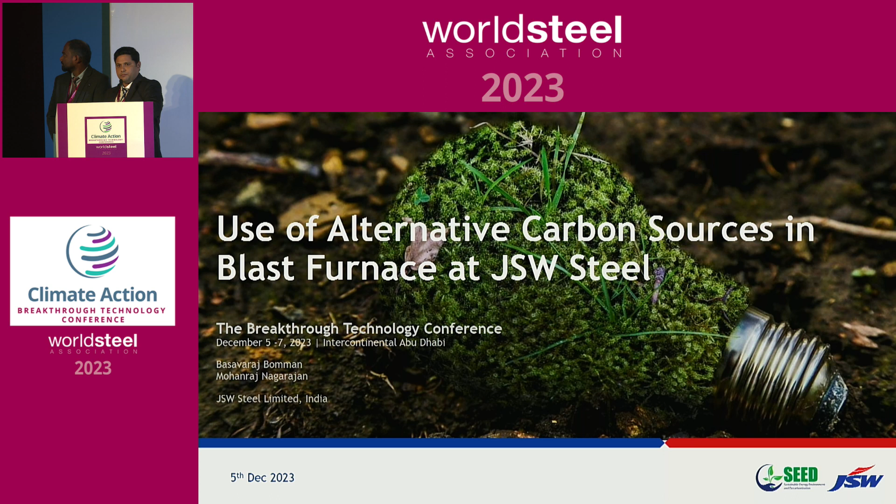Let me introduce about JSW Steel before going into details. JSW Steel is presently 28 million ton capacity, and it has 5 integrated steel facilities across India and also 7 downstream facilities in India. And also we are present overseas, we have facilities in USA, we have facilities in Italy.

Both put together having a capacity of 3 million ton. If you see the right side of the slide, which shows the growth journey of JSW Steel, JSW Steel started in FY99 with 0.8 million ton capacity with Corex technology what we have started with. And we are very ambitious and aiming to achieve 50 million ton capacity production by FY30.

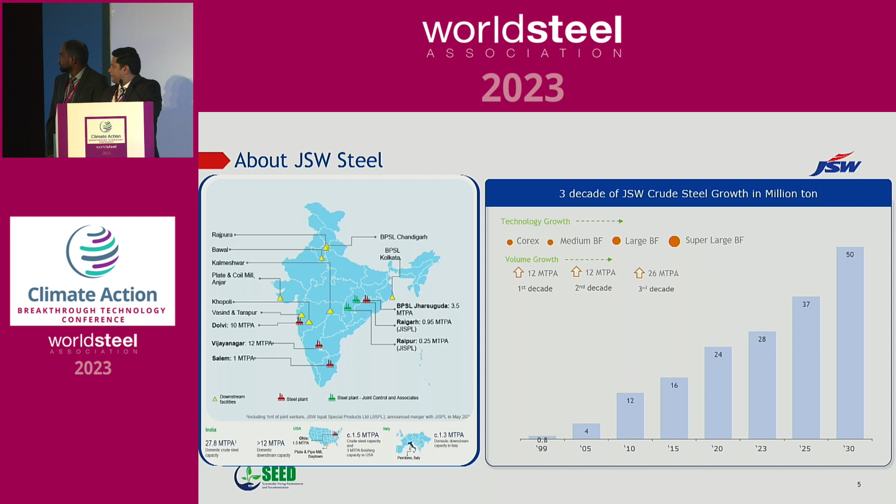As for any business, sustainability becomes the paramount focus area for us. The Sustainable Development Goals, 17 parameters, are the major paramount focus area. We are in line with the national and international framework, and along with that, we are driving sustainability initiatives across all platforms, and also started reporting sustainability parameters in integrated reports.

So I want to seek your attention on this slide, which shows JSW's roadmap for decarbonization. We are targeting 48% CO2 reduction by FY30. If I see, the graph shows two parts of this.

One is whatever we have achieved till now. The base year is 2005. From 2005 till now, we have reduced around 30% of CO2. From here, the challenge and journey begins now. The challenge is very high.

Further onwards, we are planning to reduce around 18 to 20% of CO2. So by FY30, we are committed and published that we will be less than 2 ton of CO2 for producing 1 ton of crude steel, somewhere around 1.95. Though it is published, we have got an internal target much lesser than this.

So the major levers for reducing the CO2 is, one is RE power, the second one is solid fuel reduction and gas injection in blast furnace, pellet burden and increasing pellet in blast furnace, scrap addition and waste heat recovery.

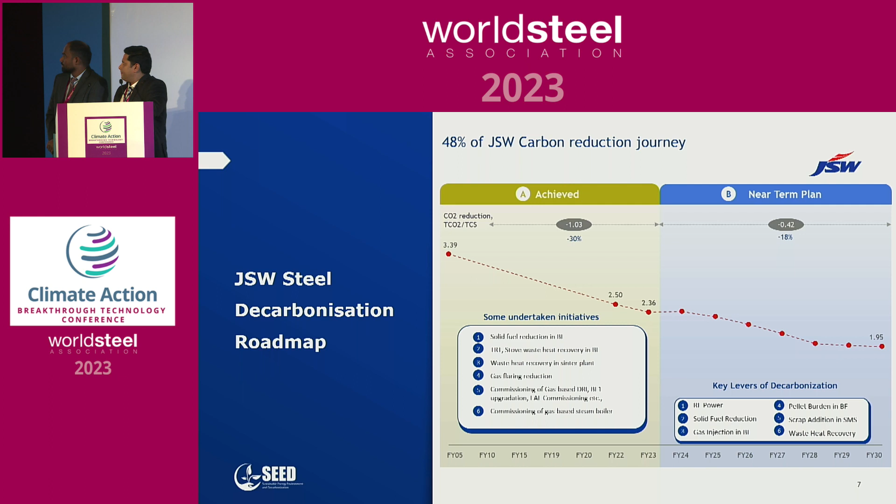So in the last slide, we have seen the short-term plan. In this, we are seeing this decarbonization journey strategy for JSW Steel. We are working on 4 different themes: fuel and energy recovery, and energy and technology transformation and circularity.

So in the long-term plan, we are planning fuel rate optimization through hydrogen injection in blast furnace and syngas addition in blast furnace and hydrogen injection in DRI units.

Coming to energy recovery, we are planning top gas recycling. In the morning session also we have seen the Corex 50, so this is also one of our main concepts, and slag heat and waste heat recovery of the slag. In this energy transition, we are going to transform the technology of end campaign BF and implement CCUS across our manufacturing unit. We are also working, and soon we are going to commission scrap-based EAF facilities in our complex.

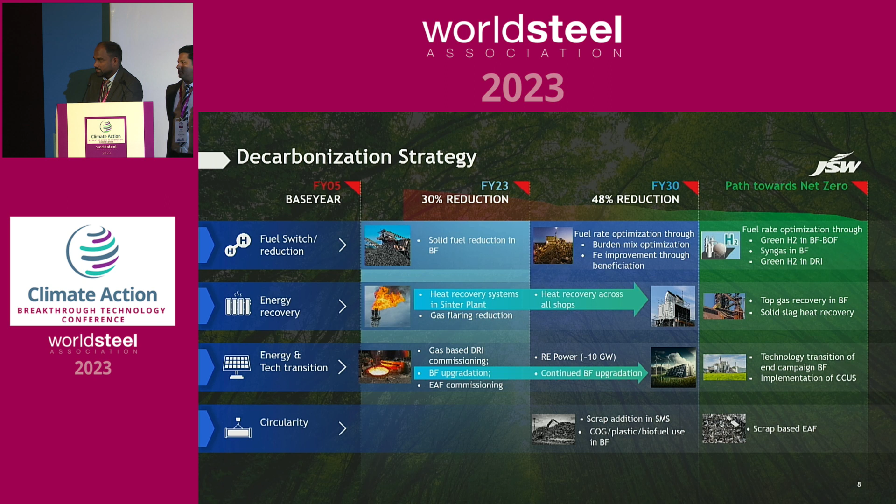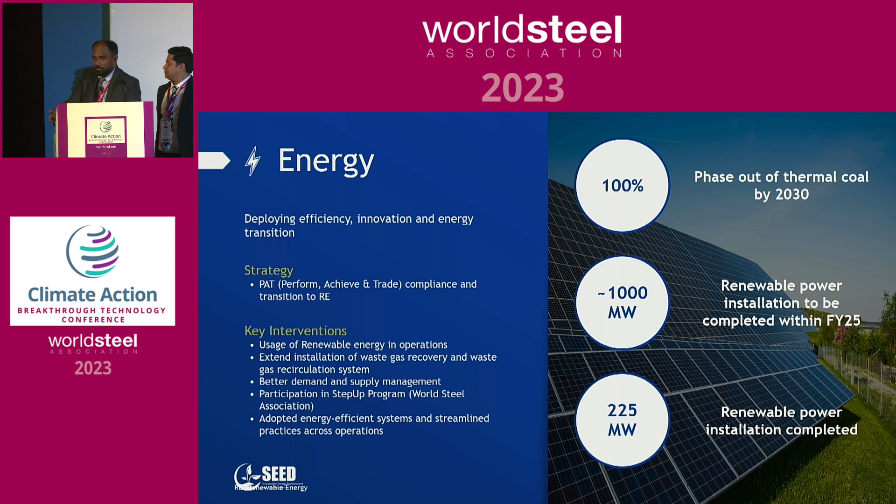Coming to one of the major initiatives, as of now we are operating 225 megawatt of integrated steel plant facilities, and this is solar based, and 600 megawatt of RE through wind we are going to commission very soon. Total by FY25 we will have 1000 megawatt RE power in the integrated steel plant facilities. By 2030, we are going to phase out 100% of thermal coal-based power production. We'll be around 50% RE power in our circuit, remaining 45% gas-based power, and remaining 5 to 8% from the grid.

The next major initiative is green hydrogen. We already have a foundation of 25 megawatt electrolyzer, capable of producing 5,000 nm cube of hydrogen. In phase 1 and phase 2 we are going to make 20,000, and in phase 3 we are going to make 125,000. This will fulfill our requirement of green steel production for DRI units. We are already running a 2 million ton DRI unit in Vijayanagar.

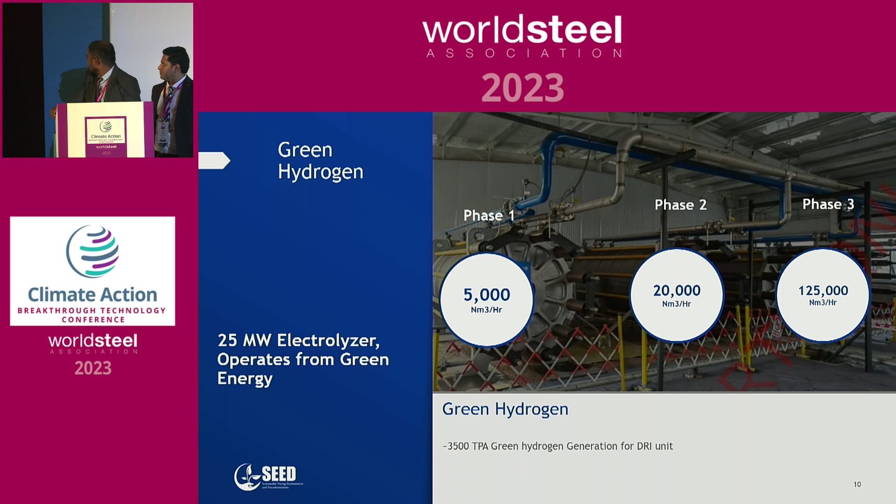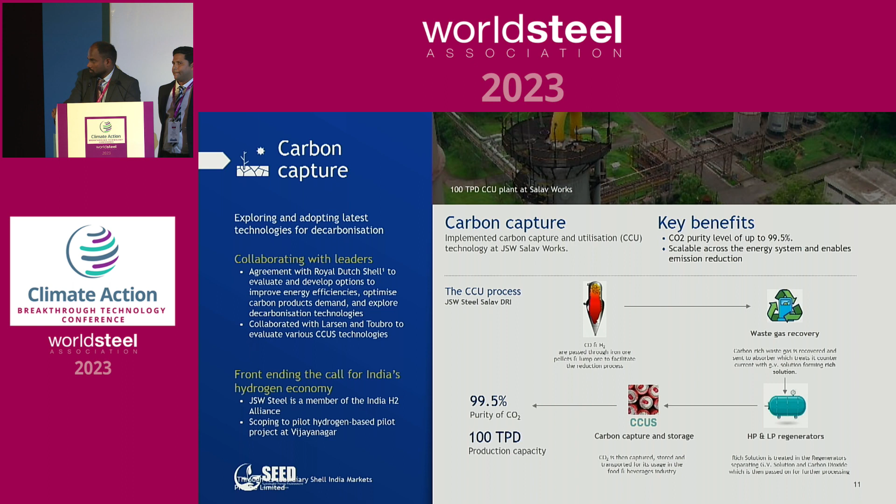The third is carbon capture. We already have a 100 TPD carbon capturing plant in the Salav unit, with a purity level of 99.5%. We are working to scale this production unit to all manufacturing locations, and we have tied up and collaborated with suppliers to study the feasibility of various CCUS technologies in our complex.

Let me tell how the decarbonization journey is going in JSW Steel. We have launched a program called SEED, which stands for Sustainable Energy Emission and Decarbonization. This program was launched in JSW Steel Vijayanagar, and now it is horizontally deployed in Dolvi, Mumbai. This program involves bottom-up employees capturing ideas for decarbonization and energy conservation.

We have identified more than 400 participants and more than 200 initiatives. These initiatives are being tracked and monitored in climate action centers. We have 15 climate action centers in JSW Vijayanagar, where all the projects are tracked and monitored every fortnight, and we have 40 initiatives which we implemented in the last financial year.

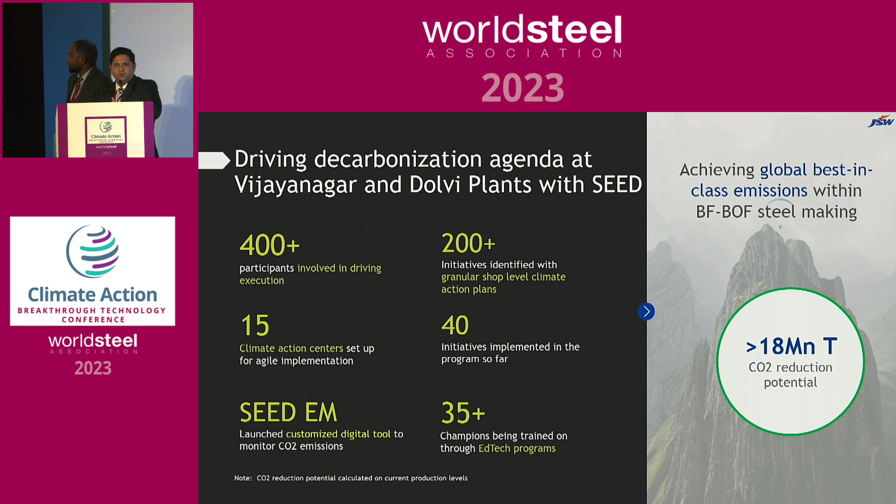There is a digital platform called Seed Emission Manager, where the CO2 generation and impact KPIs affecting CO2 are tracked in this emission manager dashboard. Access is given to the shop floor manager, who will be able to see the impact of CO2 by different KPIs and processes, and we will be able to take control.

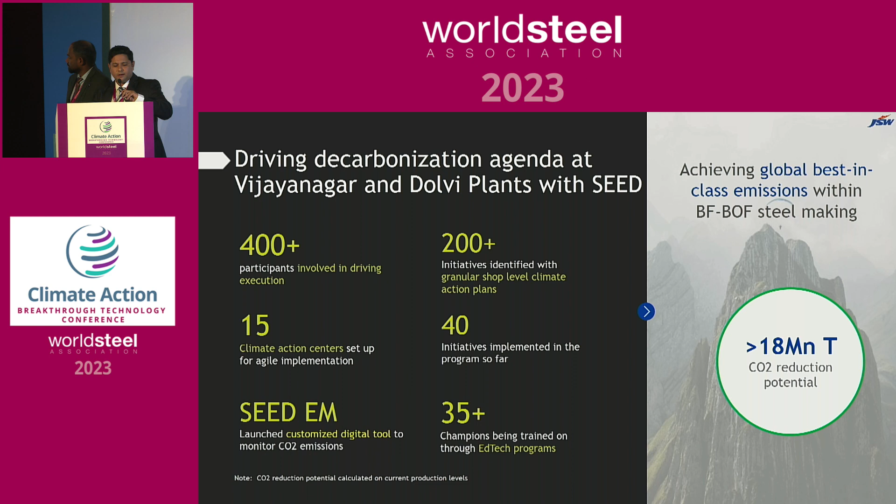Through this seed emission manager, we are aiming to cut down CO2 emissions by 18 million tons. There are more than 200 initiatives as I mentioned, across different themes like fuel consumption reduction, circularity, and alternative fuels.

Today I would like to take a deep dive into 4 focus areas, 4 projects: waste plastic injection in blast furnace, COG injection in blast furnace, super sinter which is injection of COG in sinter plants, and charcoal trials in sinter plant.

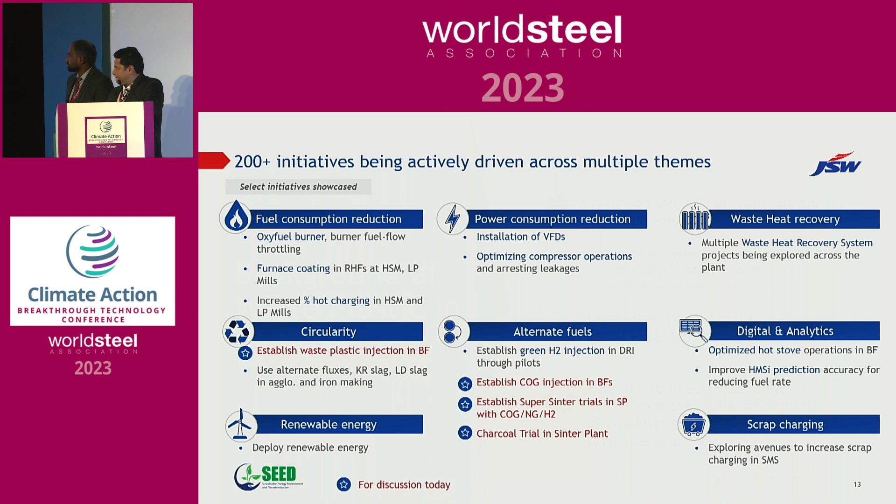Let me give some context before going into details of the plastic injection. In India, almost 10 million tons of plastic is generated every year, out of which 60% is recycled and 40% creates pollution. India is presently operating with capacity to produce around 120 million tons of steel.

It is very ambitious to produce 350-400 million tons by 2050. At the present level of 120 million ton capacity of steel production, if we consume 4 million tons of plastic in our plants in India, that would be around 30 kg plastic injection per ton of hot metal in the blast furnace, which will give us a good benefit.

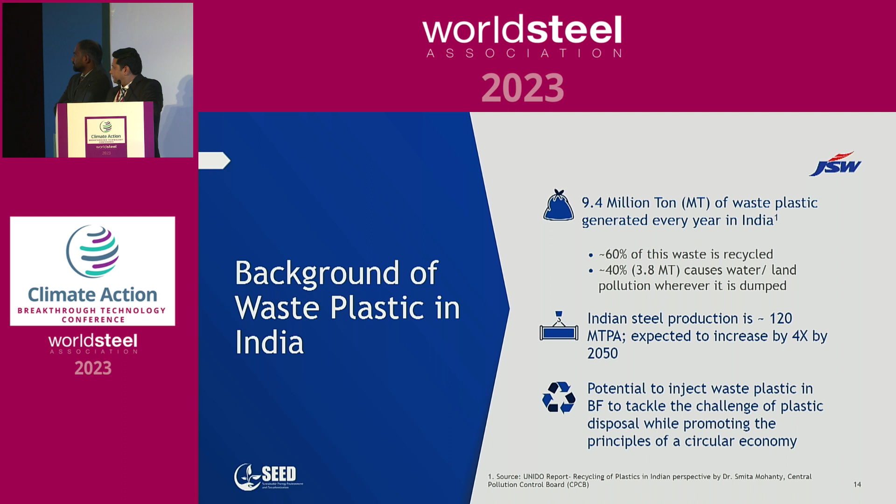To study this 30 kg impact in the blast furnace, we decided to begin trials to check the feasibility. The objective is to demonstrate successful plastic injection by conducting multiple trials using various kinds of plastics like chips and granules, and different kinds of lances for injecting PCI, like single lance and coaxial lance, with and without PCI. We have set up a design of experiment and started working on this.

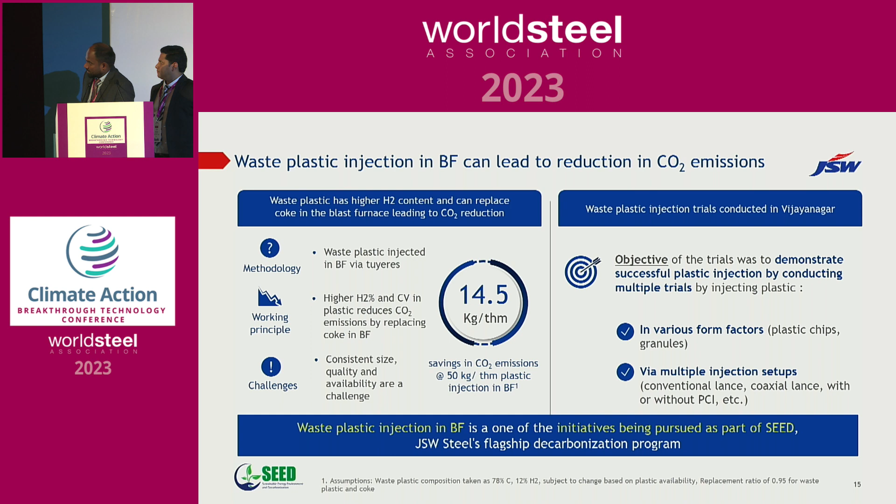The main methodology is we are planning to inject via tuyeres. Because of higher hydrogen content, it's a good replacement - we are doing a one-to-one replacement of coal to coke to plastic.

We conducted various trials. The first set of trials used fibrous plastic chips up to 20 kgs, which we took from our state government. We saw some problems with our injection facility because of the fibrous nature of the plastics, and our hopper got choked.

The second trial, we planned to use granules. We started this in one of our medium-sized furnaces, around 2,000 meter cube furnace. Initially we started injecting up to 1 kg, but it got melted in the lance while we were ramping up to 30 kgs.

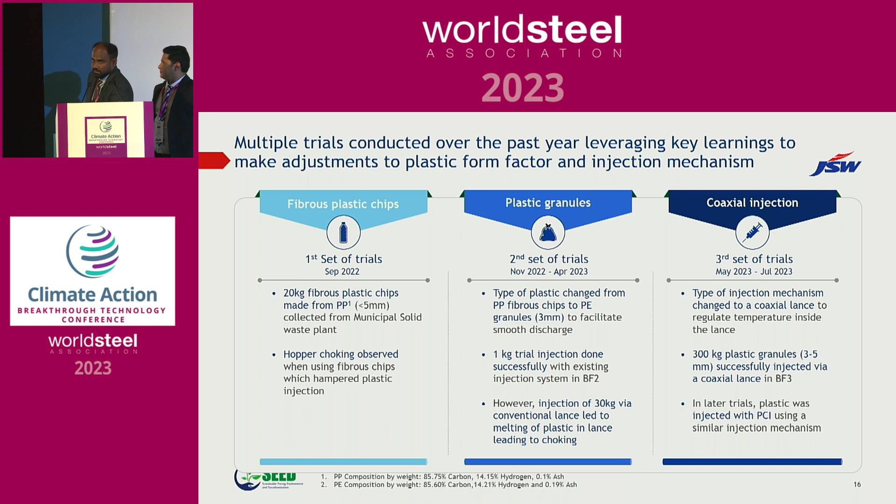So we set the third trial with coaxial lances, where we injected around 300 kgs. The melting problem with the single lance is avoided in the coaxial lance. So this first set of trials, this is what we did - the hopper got choked.

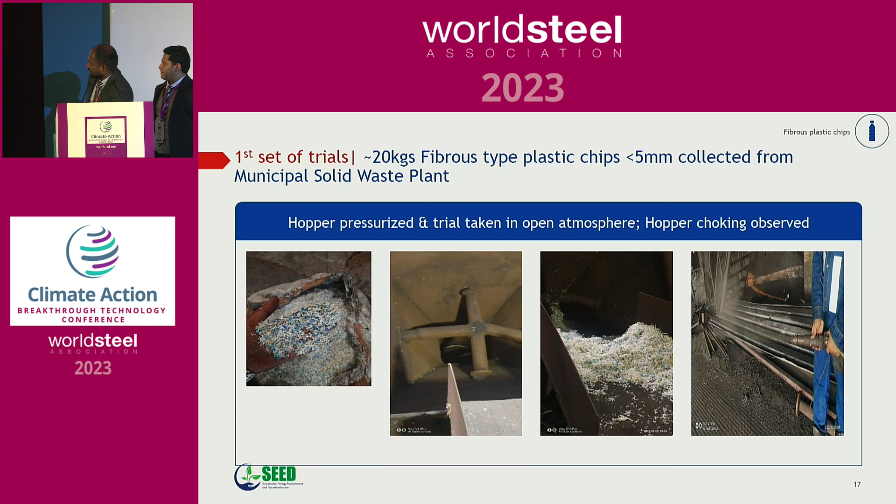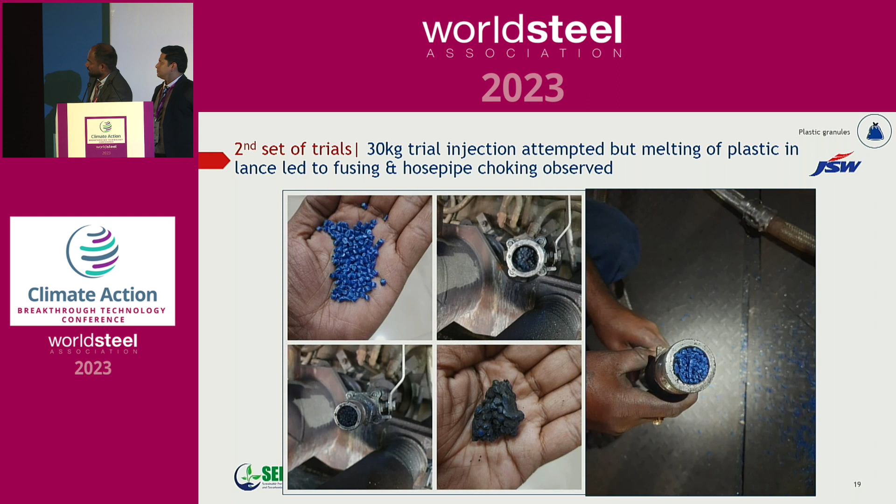So we went for the third set of trials. This is the image of the third set of trial, injected in a 4,000 meter cube blast furnace. It was successfully injected up to 300 kgs. The plastic size is 3 to 5 millimeter granules.

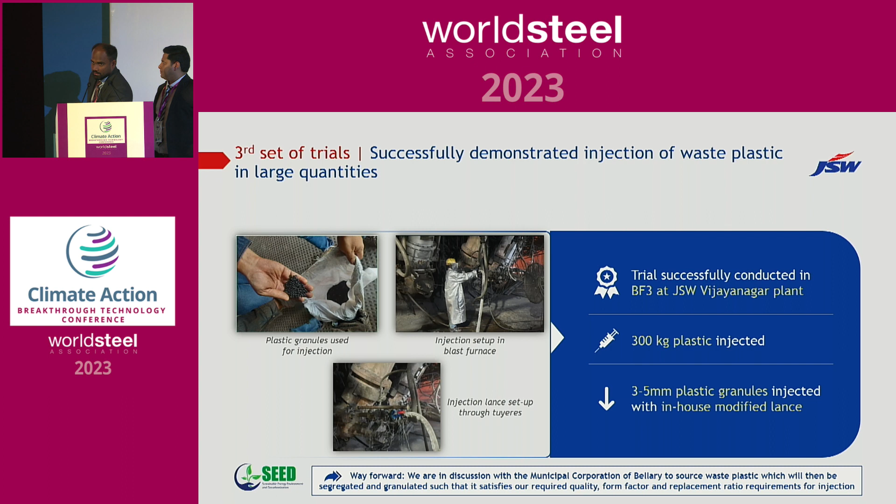Going forward, we are discussing with our state government to identify and segregate the granules, and we are going to scale up the usage.

The next lever is COG injection in blast furnace. Before going to details, I want to give the context setting of COG. We have 3 coke oven plants with a capacity of 6.5 million tons, generating around 3,25,000 nm cube per hour of COG gas. Presently this gas is being used in reheating furnaces in the downstream mills and such.

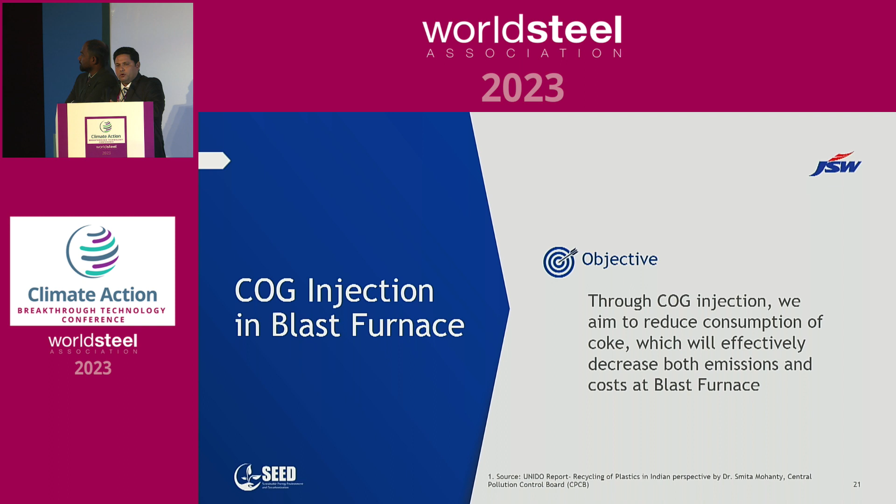In future, as I told already and my colleague also told, we are going to go for RE power, 1000 megawatt, and also we want to go for electrification of these reheating furnaces. With that, we want to use this COG gas and inject it in the blast furnace.

This slide shows the chemistry of the COG gas in our plant. It is much rich in hydrogen, with 56%, and methane around 25%. The challenge for using this COG gas remains the impurities, which we are working on.

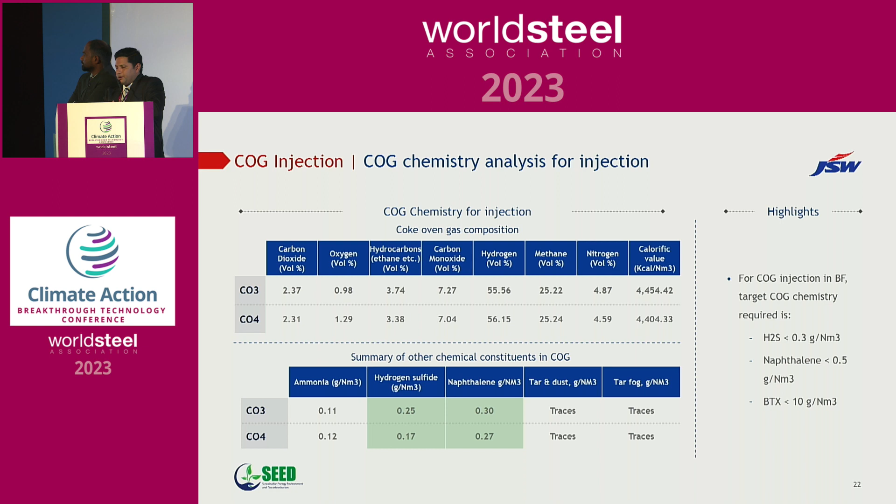While carrying out this COG study, we did an understanding of the CO2 impact. COG can be injected directly in the tuyeres, or we can see the impact of making syngas and injecting it in the shaft. We selected two furnaces: a medium size furnace of 2000 meter cube and a 5500 meter cube capacity furnace. In small or medium size furnaces, this COG or syngas impact is very, very small because of the efficiency factor.

In the large furnaces, while adding this coke oven gas, we are getting good benefit within 2 years. We are getting syngas benefit of around 66 kgs in large furnaces, whereas we can increase the syngas in smaller furnaces up to 400 meter cube. We are getting around 99 kgs benefit in CO2.

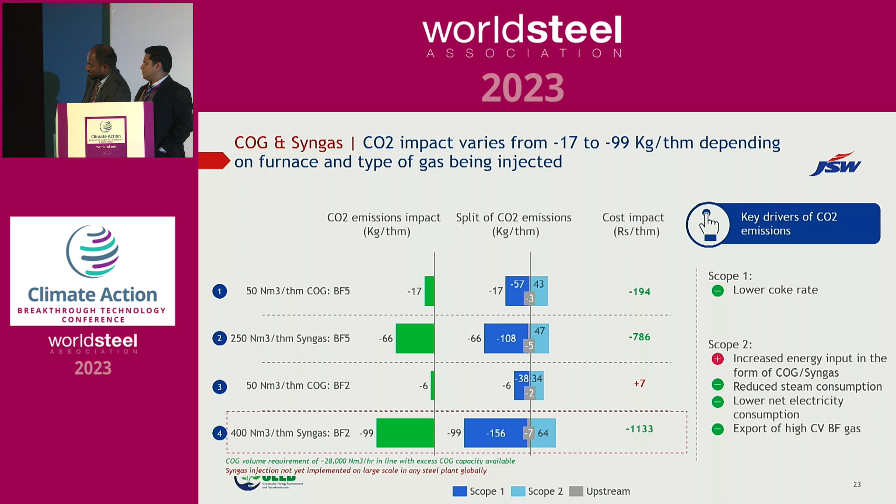The major impact is on scope 1 and scope 2. Because of the higher grid emission factor for converting COG to power, we are getting a lesser benefit from COG injection in the blast furnace.

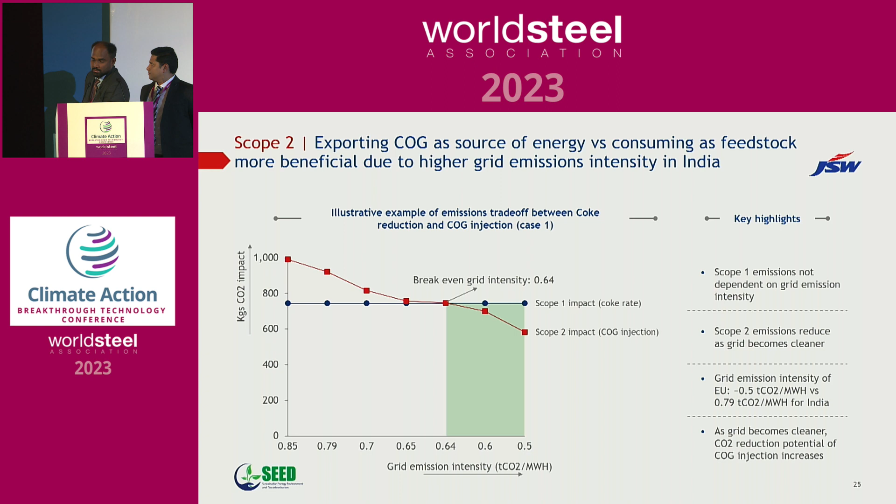Coming to super sinter, we have taken trials and studied super sinter at our plant. As I mentioned, we have COG gas and we want to inject it into sinter making also. We want to take that gas into the hood and put it into the sinter plant.

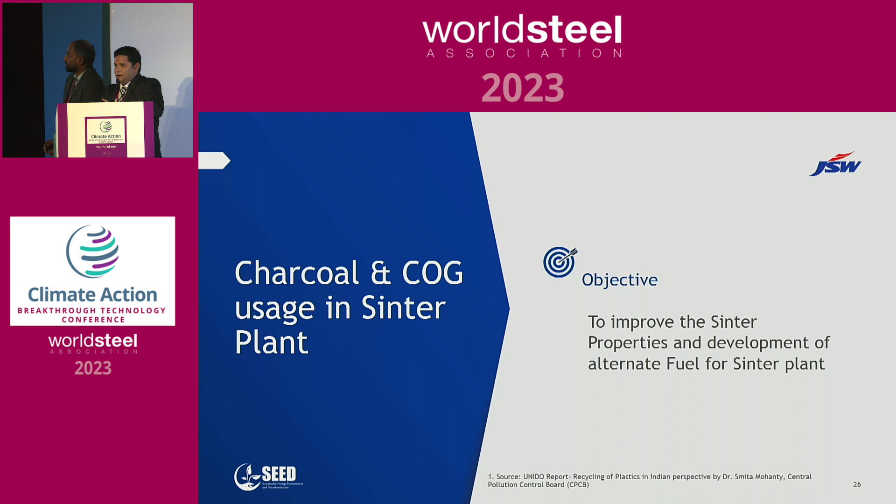This is about... sorry. Yeah, this is about the charcoal that we use in the sinter plant.

Charcoal, we have taken multiple trials. We replaced the solid fuel, that is coke breeze, with charcoal. The replacement, we put trials of around 22%, 45, 65, 85%. We could see there is an improvement when we add this charcoal at 20-25%. Over and above that, it gives a negative impact.

The sintering time has come down at 25%, and the tumbler index has improved. So in overall benefit, there's 8% improvement in productivity, 1.4% improvement in the tumbler index, and 15 kg CO2 reduction. It has also improved the SOx and NOx levels.

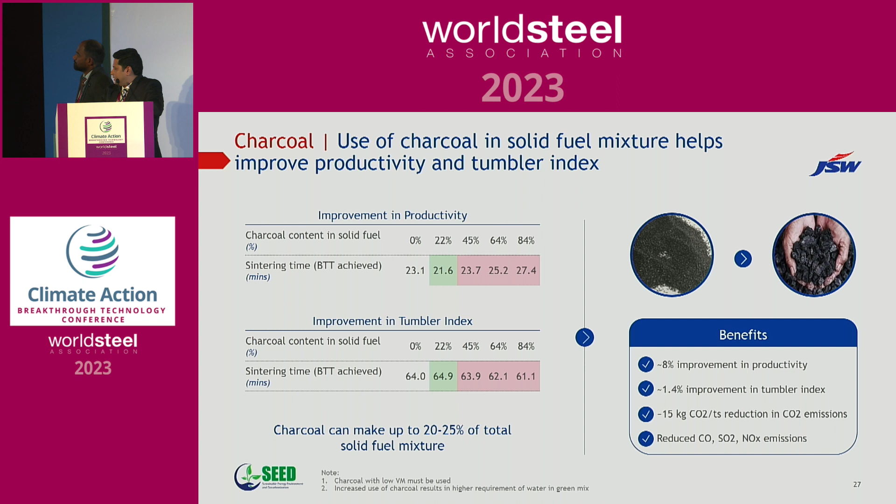So this is about the COG injection. There is a misplacement of the slides, it seems, sorry for that.

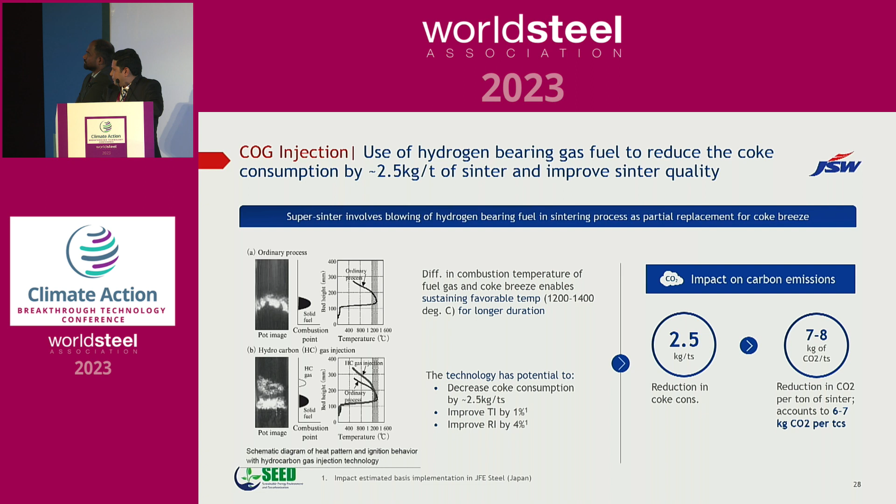We are having a 20 million ton capacity iron ore beneficiation plant. Further, from present level of 40%, we are going to 84%. We are installing a new beneficiation plant and we'll be washing iron ore. So we are going for 84% beneficiation of the iron ore we procure.

Apart from that, in future, reduction in coke rate is going to come through COG injection, and there are many other things we are doing, reducing utilization and increasing PCI.

Increasing usage of RE - total JSW Steel at 50 million ton capacity will require 4 gigawatts of power. For 4 gigawatts of power, we have a roadmap plan of generating around 2 gigawatts of RTC power, RE power.

Apart from that, we are exploring technology like CCUS and increasing scrap usage. Presently, we are using around 13-14% of scraps. In coming days, we want to charge up to 22-24% of scraps in our steel making.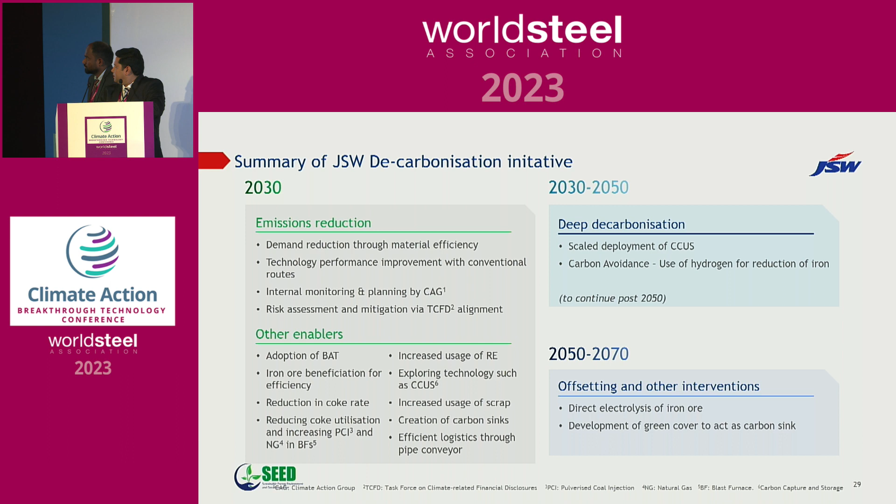And creation of carbon sinks and efficient logistics through pipe conveyors. Thank you.

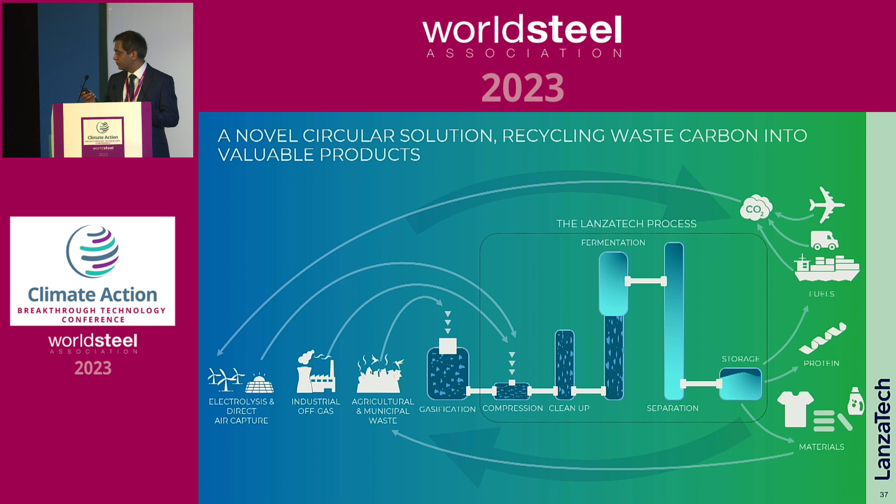The journey for LanzaTech - a 2005 startup - we have already built a few plants at commercial scale. 2018 was the first commercial-scale plant, built in China. As you can see, this is certified ethanol, ISCC Plus and also RSB certified, meaning very high grade ethanol that can be used in the aviation sector and chemical sector.

Then we went on through 2021, 2022, and 2023, commissioning plants one after another. We had 4 plants commissioned at commercial scale until this year, using ethanol for various applications.

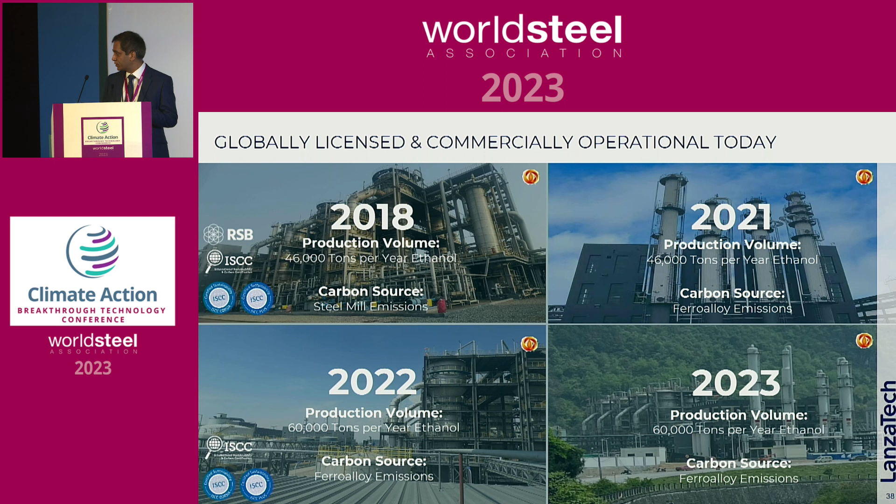2023 was a very important year for us, specifically for two projects. One was with Indian Oil Corporation, a very unique project - they had emissions very rich in CO2 content, and also emissions high in hydrogen content that were being vented into the atmosphere. We brought those two molecules together and started producing ethanol, creating value for the client.

The second one, of course, was with ArcelorMittal Belgium at Ghent - I have a colleague here from ArcelorMittal Belgium. What we did there was set up the plant, take part of the blast furnace gases, and use those gases to produce ethanol.

Last month, as I said before, we ran at commercial scale and produced hundreds of tons, and next year we'll be producing thousands of tons from this plant. Most of you are welcome to visit Steelanol, and I'm sure ArcelorMittal will help us if you'd like to visit Steelanol in Ghent at some point.

I'd like to take you through the journey - thank you again to ArcelorMittal for sharing these slides with us. Just a quick journey through the ArcelorMittal commissioning, how it happened. Please appreciate that during this period we also had COVID, labor shortages, and other things happening, so it took a little longer than we anticipated.

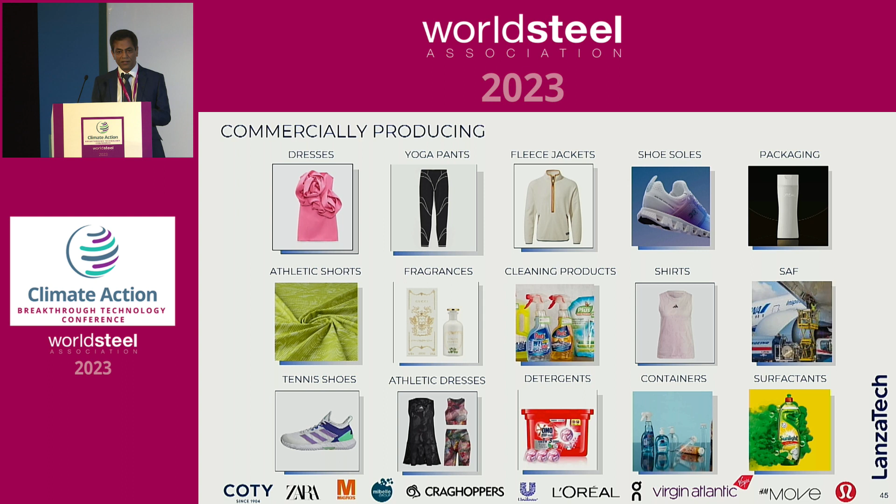This is about sustainable aviation fuel. So ethanol, one building block, is to go into the chemical sector where you create huge value for the clients and for you. The second thing is about sustainable aviation fuel - you can take that ethanol and produce sustainable aviation fuel. LanzaTech was again the initial inventor of this technology. Back in 2019 we spun out that company because it's totally a separate business, so that company was spun out as LanzaJet. So we have LanzaJet producing sustainable aviation fuel now, with about 7 plants coming up at commercial scale producing sustainable aviation fuel from ethanol.

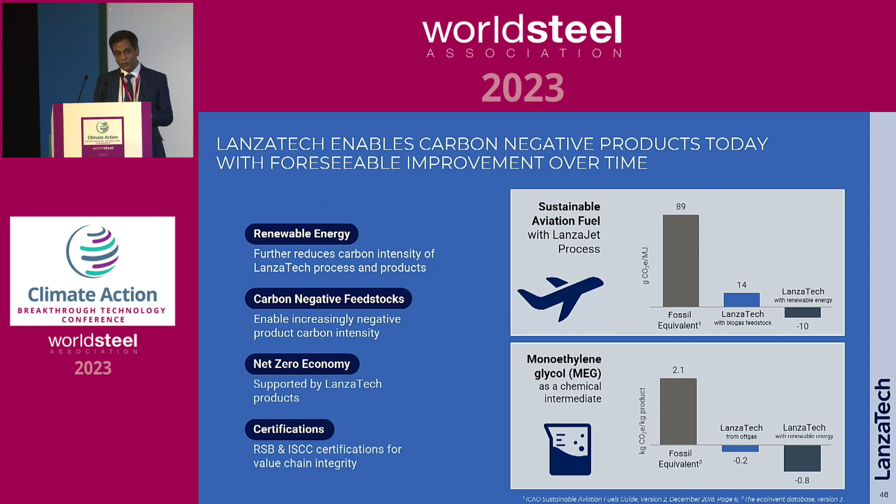Another important thing - we completely understand and appreciate that the technology we're doing in the steel industry will evolve over time. There will be new technologies coming up. It's not that we are trying to promote blast furnace. What we are trying to say is use the technology that is commercially proven today, and start creating value and helping the planet reduce its carbon footprint.

So our technology is very much customized - it's more modular technology. What we can do is, as of today, we have a technology where we produce ethanol using one type of bacteria. But tomorrow, we have already proven the technology at pilot scale and also at some demo scale plants - we can produce isopropanol, acetone, MEG. We use the same reactor, same equipment, everything remains the same, no change at all. The only thing you change is the bacteria - you don't change the feedstock, you change the bacteria, and you get the material you really want to produce.

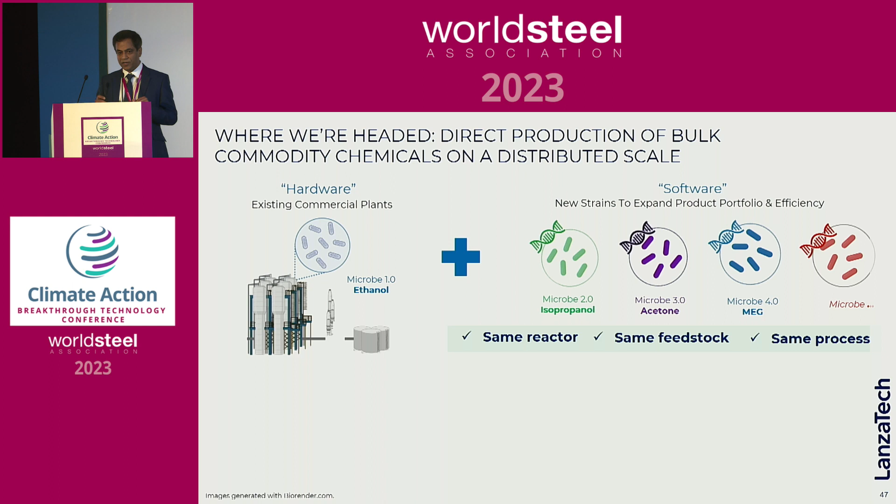We are working - LanzaTech is a crazy company. We have lots of PhDs, doctors working every day and night. We have a number of molecules which we are developing in our process, and we expect we will be developing some more molecules in the near future to help the chemical industry.

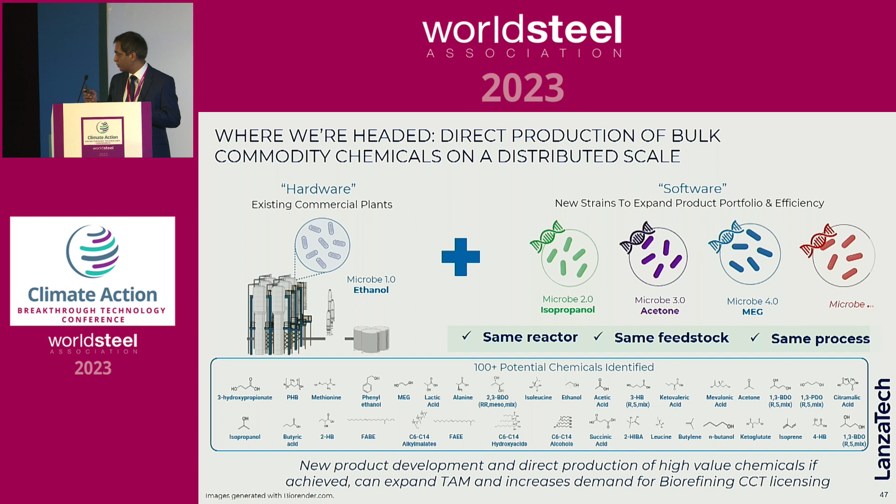So if I talk about iron and steel decarbonization, where we fit as LanzaTech - the IEA report in 2023 clearly states that CCUS is going to play an important role. They did not differentiate how much CCS and how much CCU, but it's about 37% CCUS-equipped steel by 2050.

We have a number of options, and we are all completely confused with those options, honestly. We also don't know where the commercial value is in those options. We are struggling trying to decide which direction we should go - should we go for DRI electric arc furnace? There are many pluses and many minuses with DRI electric arc furnace. If you think about carbon capture sequestration, this is a solution, but it's a cost avoidance. If you talk about emerging technologies, we are at very low TRL right now - probably we'll have to wait another 5, 10, 20, 50 years, we don't know how long it will take. But carbon capture utilization, what we've developed as LanzaTech, is already proven at commercial scale, which can be implemented if you order today within the next 2 years. You will start helping the planet and also creating value for yourself.

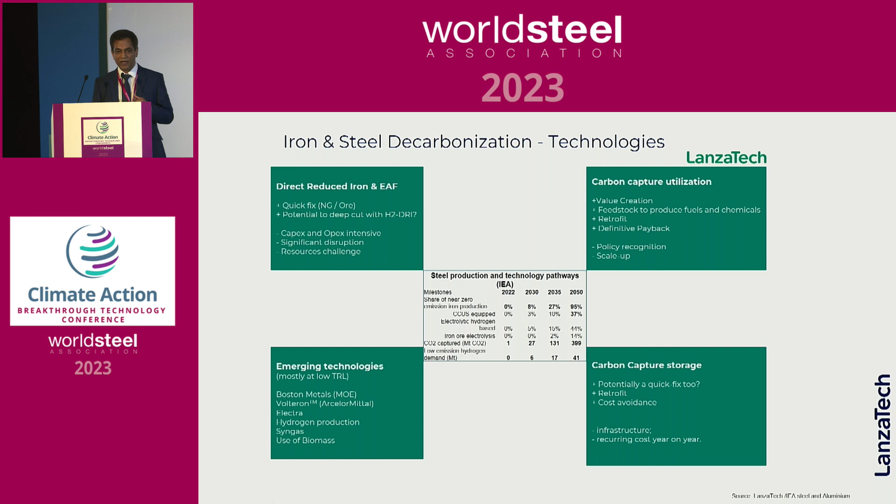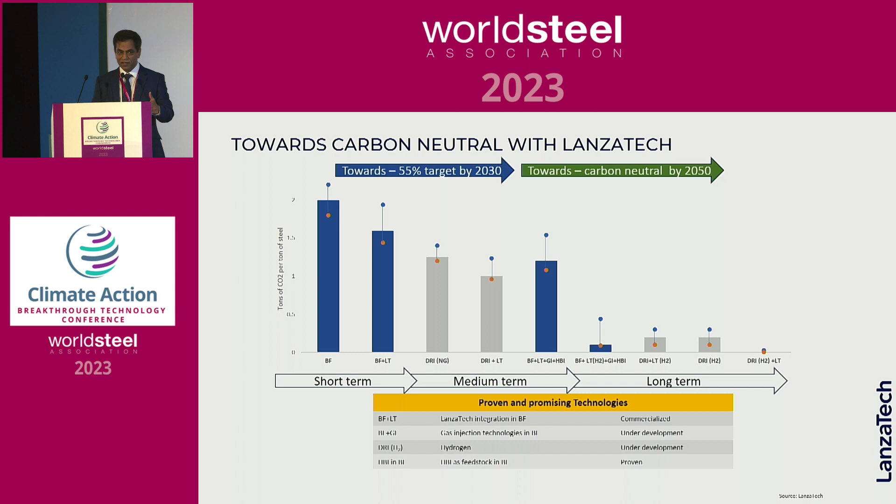So what we see is that LanzaTech on its own can help the industry right now. This is a schematic roadmap showing how we can help. If you bring in LanzaTech technology together with your blast furnace, you cut down your footprint by about 20-25% depending on gas composition. Even with DRI, if your top gas has CO or CO2 with hydrogen, you can also cut down your carbon footprint. Over time, as hydrogen becomes available, either through direct use in steelmaking or indirect use in the LanzaTech process, you can go back to nearly zero carbon footprint. And if you invest in this technology today, it never becomes redundant—it will still work with steelmaking, or in the worst case, with municipal solid waste as an example.

This is another schematic, a case study we did for a client, showing what happens if the client goes from blast furnace to DRI or some other process and no longer has any CO. Blast furnace gases are CO-rich but lean gases. So we take just CO without adding hydrogen initially to capture carbon. We only capture a percentage of carbon because stoichiometrically there isn't enough energy in the process to capture it all. So we capture about 20-25% carbon from the lean blast furnace gases. When hydrogen becomes available, we reduce the blast furnace gas volume, increase hydrogen, and still keep producing the same amount of ethanol. Over time, we also increase carbon capture to more than 90% in ethanol.

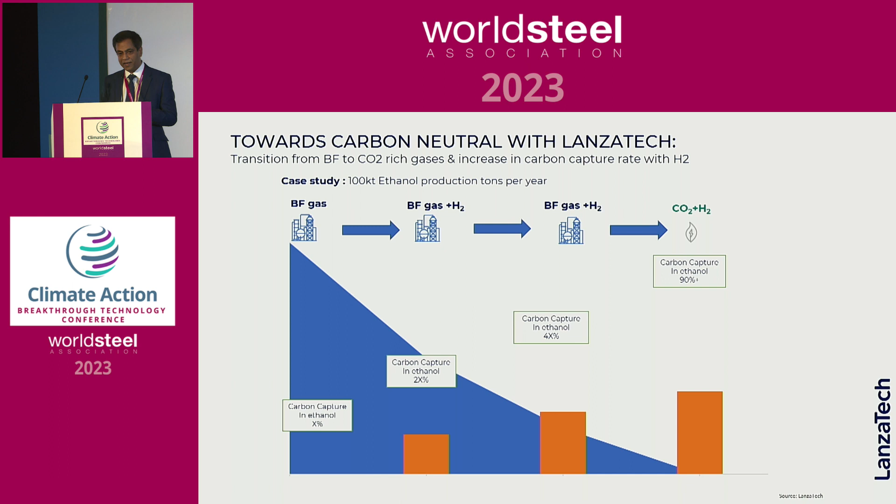We are limited, of course, by stoichiometric constraints—how much energy is available and how much carbon is available in the process. So depending on the gas composition, carbon capture efficiency varies for CO-rich gases. We have carbon capture efficiency of about 33% theoretically. The moment we start adding hydrogen, we can gradually take it to 100% carbon capture efficiency. We have commercially proven this at all scales with CO plus H2, and also CO2 plus CO plus H2. But at the pilot scale, we are currently working with H2 plus CO2.

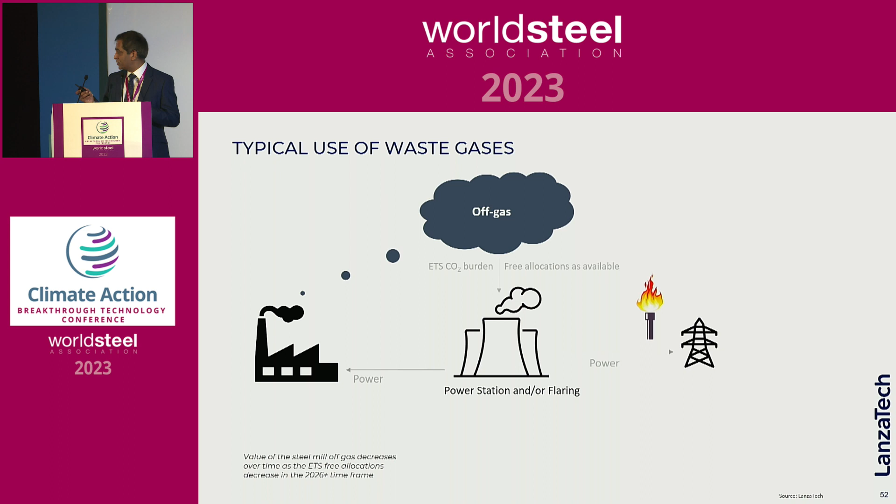In a simplified way, this is what a typical steel plant looks like today. We take the gases and either flare them—very rarely—or sometimes use them for the power plant or other applications. What LanzaTech does is take the gases from the power plant, bring them into the LanzaTech process, improve energy efficiency with those gases, and give you a chance to produce fossil-free, green power with no carbon footprint. We then produce products that add much more value than what you get from the power plant right now.

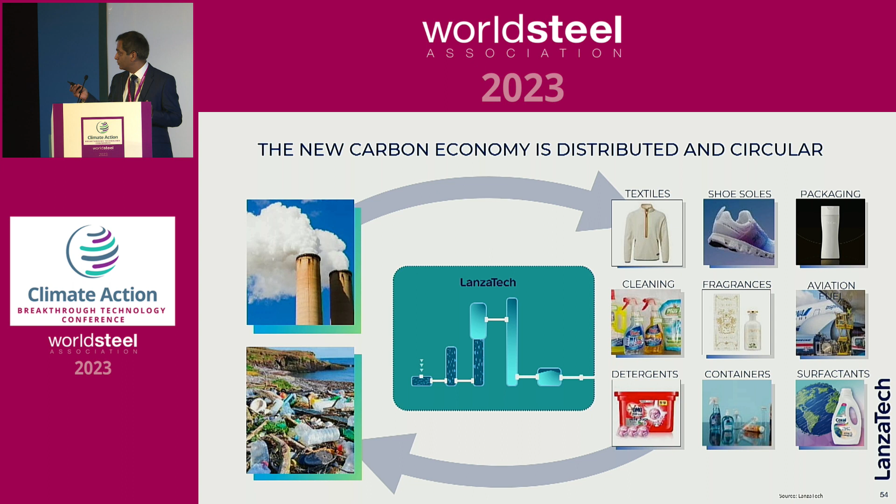On the last slide—the new carbon economy—what we believe, and what probably needs endorsement from you all, is that the carbon economy has to be a circular carbon economy. Wherever it comes from—waste or industrial off-gas emissions—there is value in it. Take those gases, run them through the LanzaTech process, produce products, and feed it back again to create a circular carbon economy. We believe the world has enough carbon already; we don't need to dig any more carbon from underground. Just leave it there, let the planet survive and thrive, and we can still create value from what we see as waste. Thank you.

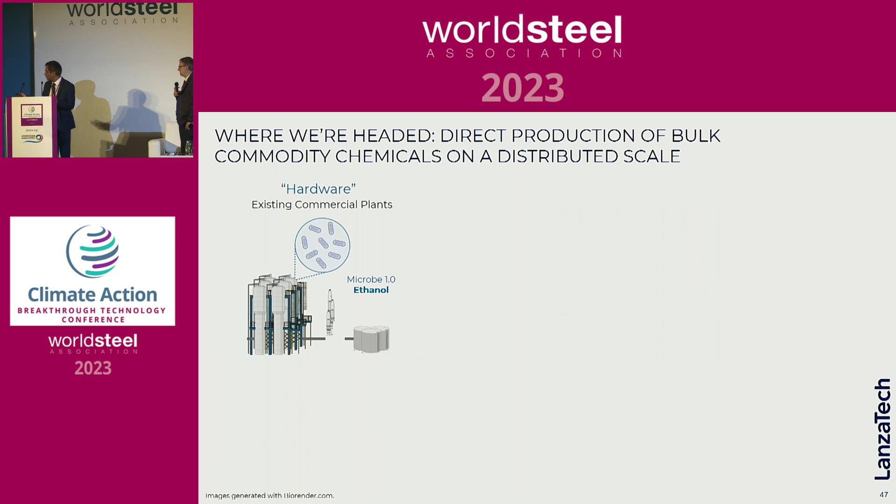So if I understood correctly, your question is more about the process itself for LanzaTech. Am I right? Let me go back to my previous slide—one second, please.

So your question is for this slide, right? You would like me to elaborate more on the cleanup process and separation process? Yeah, sure, absolutely. Thank you for that.

But generally, we love sulfur. Our bacteria love sulfur, so there's no problem with sulfur. Our bacteria loves all other gases, nitrogen and everything. There's no problem at all. It's only if you use some raw materials which could create poisonous gases that can kill the bacteria, we have to filter those gases for sure.

To elaborate on the separation process, we have the distillation process. With distillation, we separate out the water and the ethanol. The ethanol is purified and goes for further processing. Thank you very much.

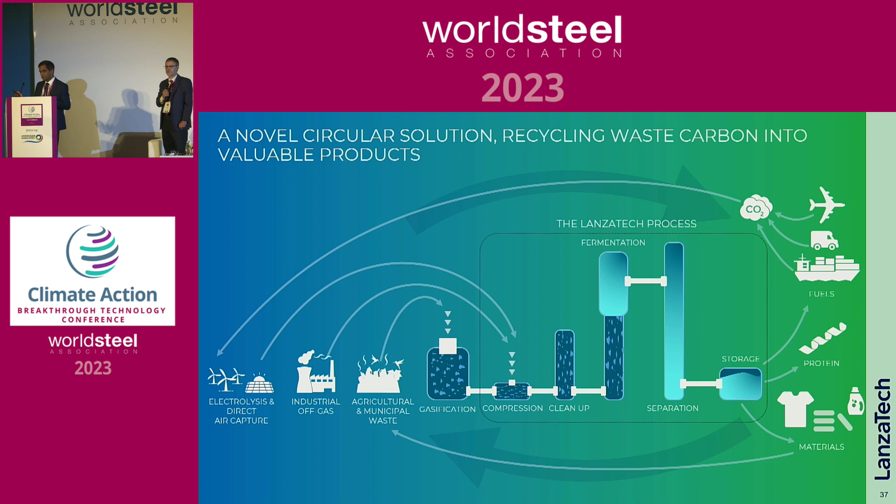Hi Sanjeev, it's a very good presentation. Sujan from Tata Steel, I would like to ask one question. In this whole process, as ethanol is considered a CCUS project or intermediate project for SAF, you require hydrogen to produce ethanol or SAF, to an extent. Am I right?

So it depends on the gas composition. Considering blast furnace gases, we don't need hydrogen - we can take the CO molecule. From that CO molecule, we can produce ethanol because there will be some water gas shift reaction happening with the water itself. We take the hydrogen from that reaction to produce ethanol, C2H5OH.

We take the hydrogen from there. But the efficiency of the carbon capture rate is limited because we are depending on the CO composition, or the hydrogen, if there is some available. But if you enrich those gases with external hydrogen, we can increase the carbon capture rate to 94%, depending on the amount of hydrogen available. So minimum 20-25%, maximum 94%.

In the long run, how do you see it, because hydrogen can be used in CDA - carbon direct avoidance - in blast furnace or DRI, as compared to CCU. So how do you see it compete with CDA in your roadmap in the long run?

I think it largely depends on the economic value we create for our customers. If tomorrow, depending on market situation - a couple of years back during the COVID situation, acetone prices, which we also produce by the way, went skyrocket high. So acetone could be a huge value for the steel plant at that time - hypothetically, rather than using hydrogen to produce steel where there was no premium available, you could produce acetone using that hydrogen and it could add a lot of premium.

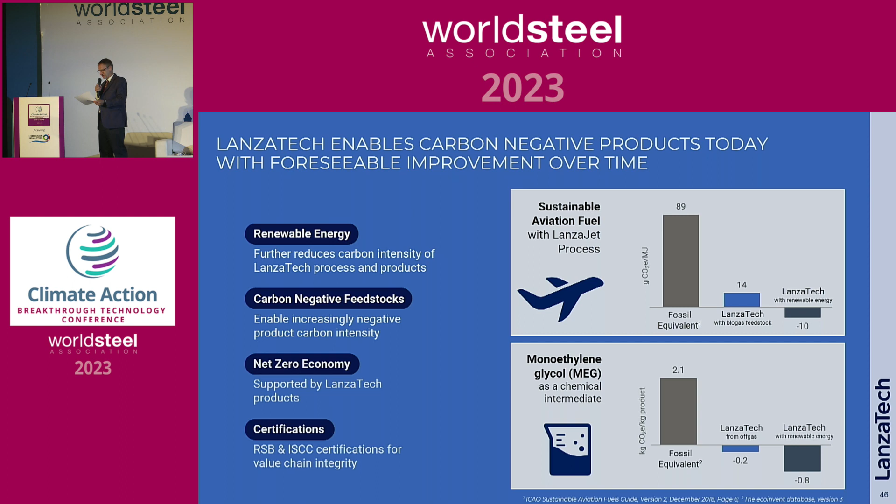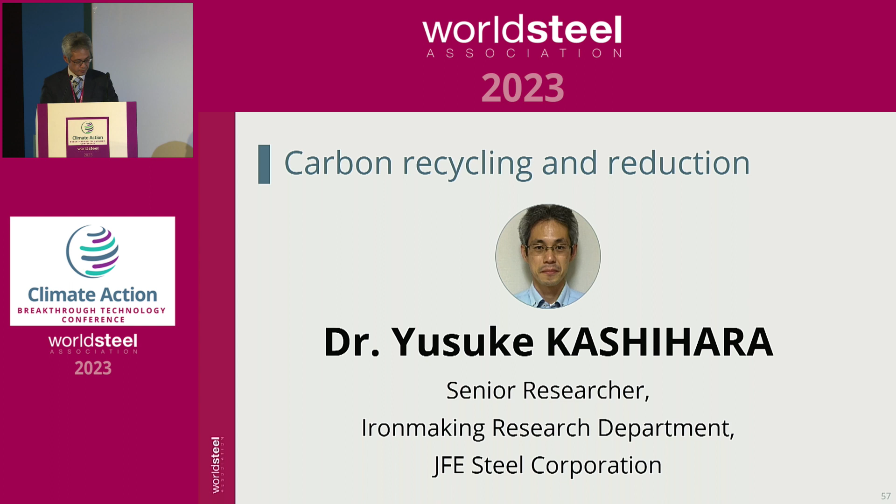Next presentation will be given by Dr. Yusuke Kashihara. He is Senior Researcher for the Ironmaking Research Department at JFE Steel Corporation in Japan, and the title of his presentation is Combining Carbon Recycling Technology. Thank you, Chairman, for the introduction. My name is Yusuke Kashihara from JFE Steel Corporation in Japan. I'm in charge of research and development of blast furnace processes for reduction of CO2 emissions.

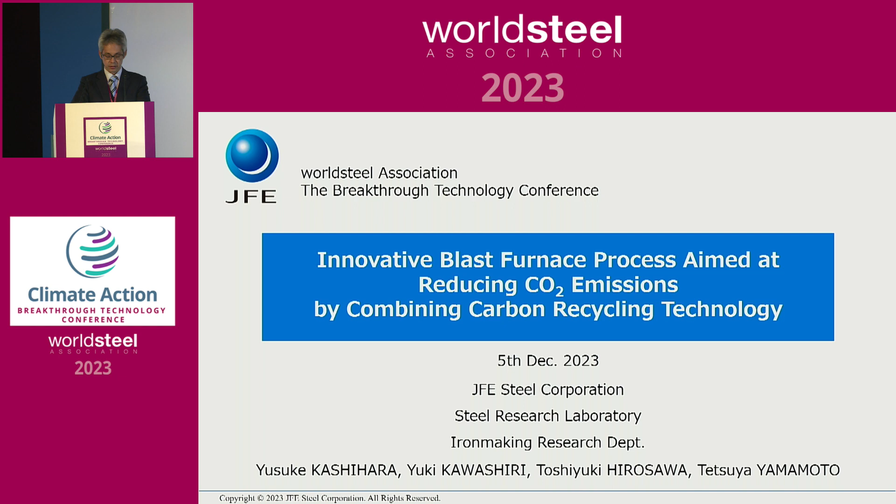Today my presentation title is Innovative Blast Furnace Process Aimed at Reducing CO2 Emissions by Combining Carbon Recycling Technology. We call this the carbon recycling blast furnace - this is a new blast furnace process. Today's topics are shown here: first I'll talk about the background, next the concept of the carbon recycling blast furnace, then evaluation of CO2 emission reduction by simulation model, and finally the conclusions.

Firstly, I'll talk about the background. This slide shows the current status of CO2 emissions in Japan. Reducing the amount of CO2 emissions is an urgent issue in the Japanese iron and steel industry. In particular, it is important and impactful to reduce CO2 emissions from the blast furnace process.

These figures show the amount of CO2 emissions. The ratio of CO2 emission from the iron and steel industry is about 14% of total emissions in Japan. The ratio of CO2 emission from blast furnaces is about 54% of total emissions in the iron and steel industry. So reduction of CO2 emissions from blast furnaces is very impactful.

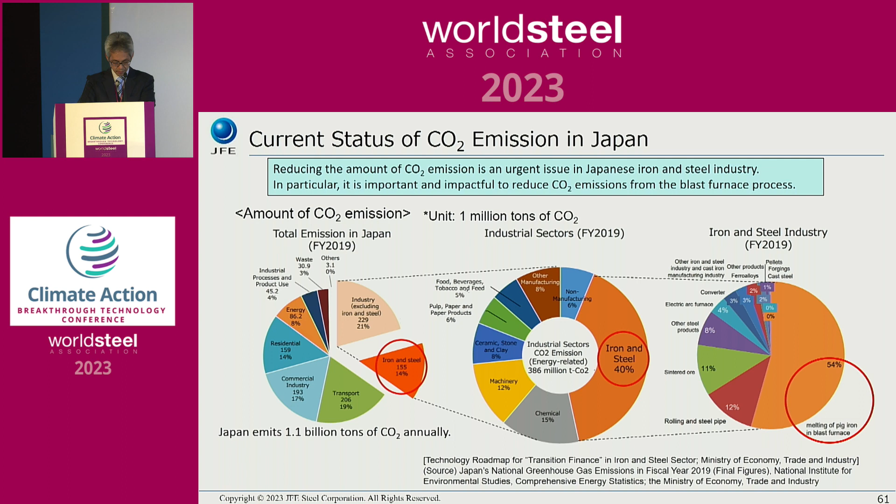To reduce CO2 emissions from the iron and steel industry, blast furnaces may disappear. However, the Japanese steel industry will continue to use blast furnaces.

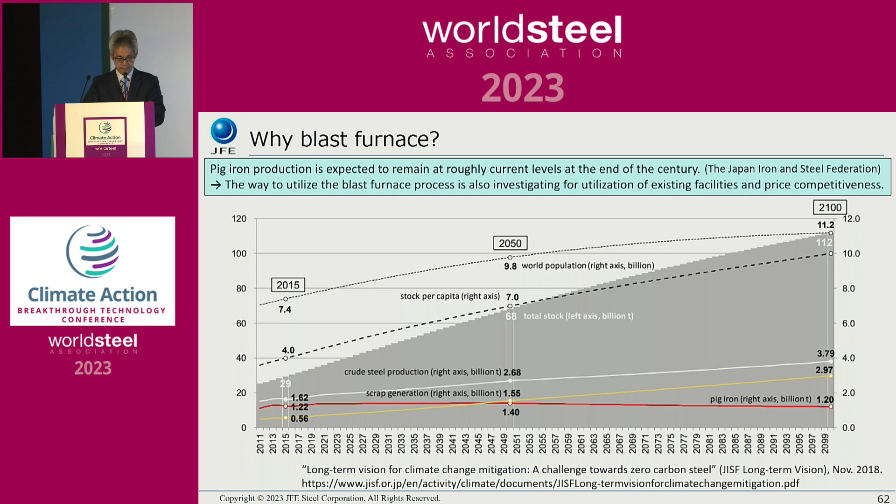This red line shows production of pig iron. According to this graph, pig iron production is expected to remain at roughly current levels at the end of this century. So the way to utilize the blast furnace process is also being investigated for utilization of existing facilities and price competitiveness.

This slide shows JFE Steel's transition to low carbon processes. At JFE Steel, to achieve carbon neutrality, the deployment of the most optimized configuration of green steel making processes is being investigated, as shown in this figure. One is a blast furnace, one is direct reduction with hydrogen, and one is electric arc furnace. As one of these configurations, we are developing this carbon recycling blast furnace.

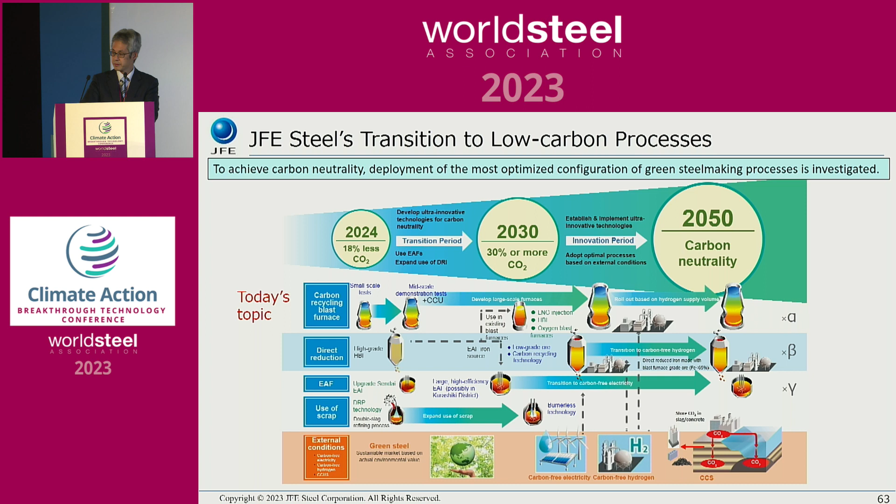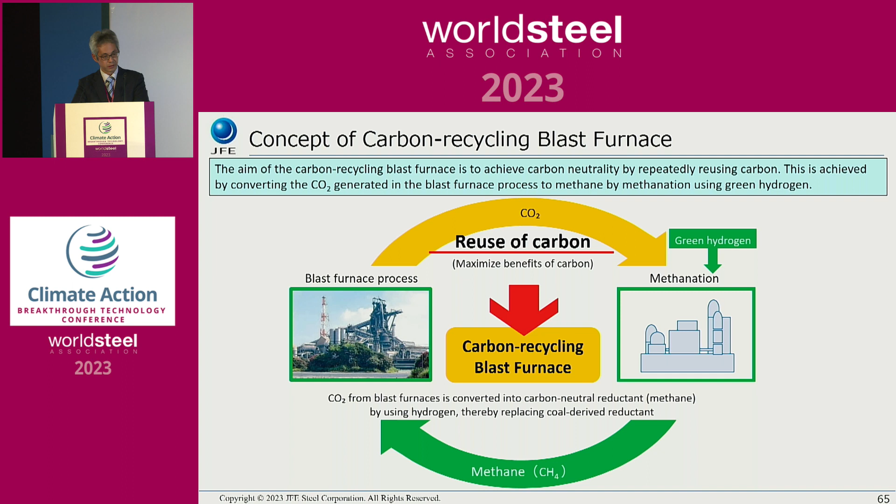Next topic is the concept of carbon recycling blast furnace. This slide shows the concept. The aim of the carbon recycling blast furnace is to achieve carbon neutrality by repeatedly reusing carbon. This is achieved by converting the CO2 generated in the blast furnace process to methane by methanation using green hydrogen. The methane is used to replace coal as reductant.

The major difference from a conventional blast furnace is that carbon is recycled by using methane synthesized from CO2 in exhaust gas from the blast furnace and green hydrogen. The aim is to enhance CO2 reduction by converting hydrogen to carbon neutral methane.

The reason for converting hydrogen to methane is that hydrogen does not react in front of the tuyere and does not generate heat. However, methane reacts with oxygen in front of the tuyere and generates heat. It is a good point.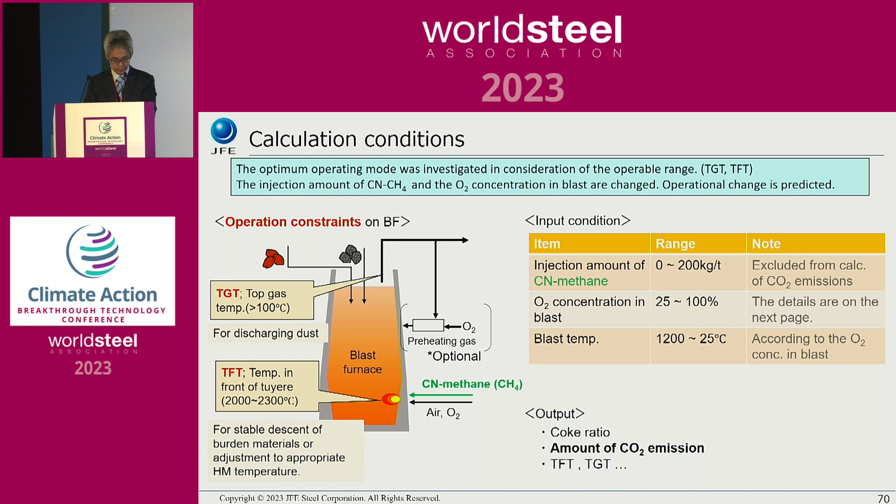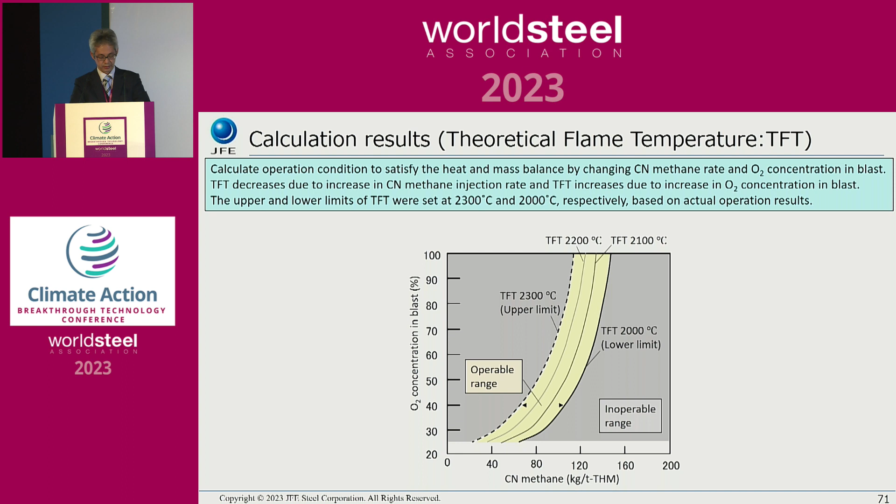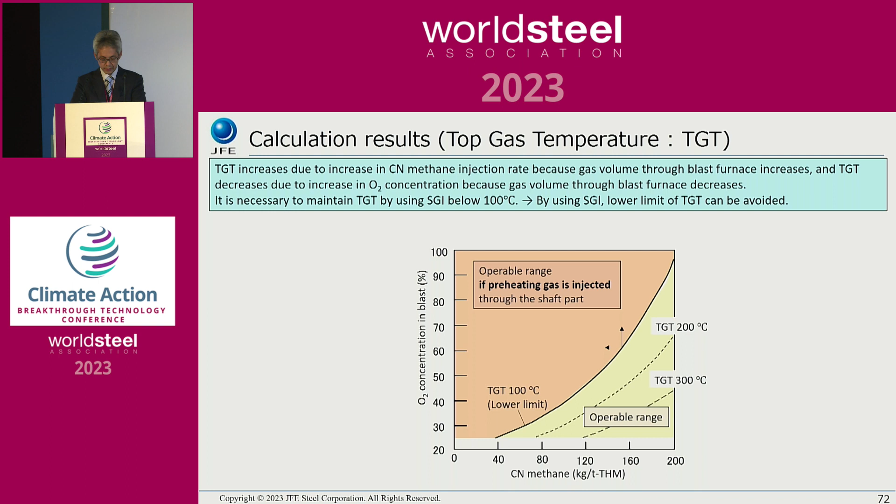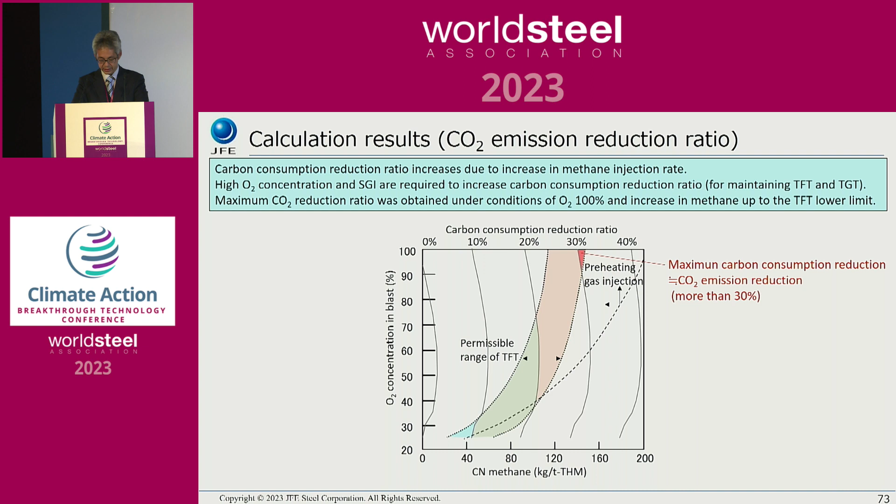Maximum CO2 reduction ratio was obtained under conditions of oxygen 100% and increase in methane injection rate up to the TFT lower limits. In the red area of upper part of this figure, maximum carbon consumption reduction area, CO2 emission reduction ratio is more than 30%.

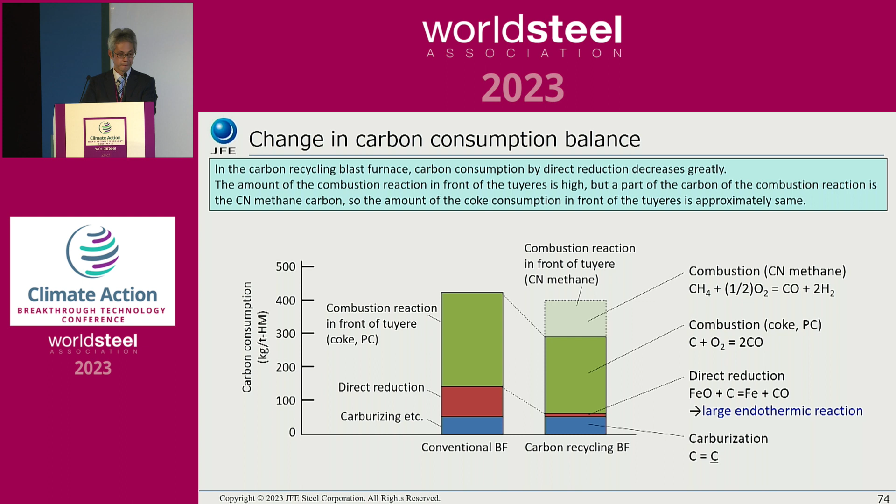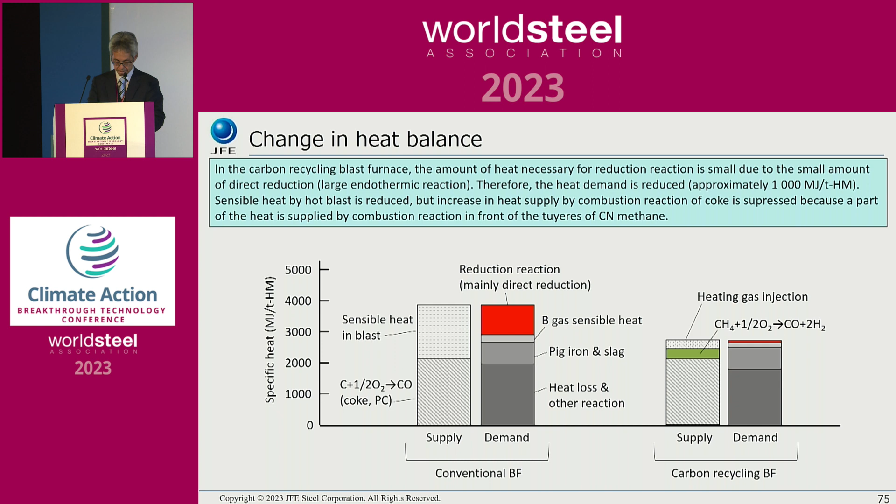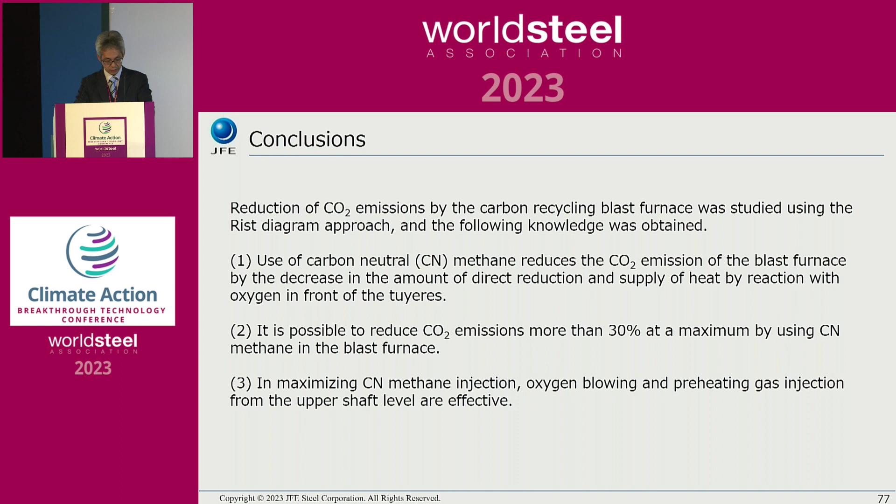Thank you for your kind attention.